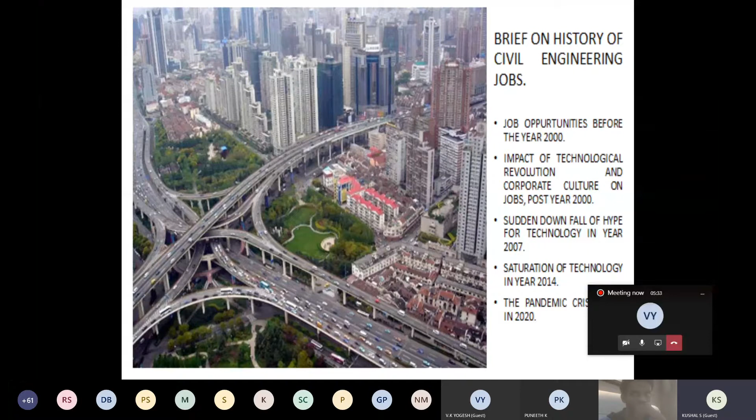It is a very tough time now, and hence I would request you all to have a little patience in learning and developing your skill set for thriving and surviving in this industry. Moving forward, we will be looking at the design and analysis of RCC structures. It was also mentioned that it is discussed using ETABS.

I would like to highlight to you all that these ETABS, SAFE, STAAD Pro, ANSYS, any of these softwares, please treat them as a tool, just as calculators, which will ease your calculation activity. Nothing else they can do. It is just as good as being left to solve a structural analysis problem with the help of a scientific calculator.

Only by virtue of having the scientific calculator, you cannot solve a problem. You cannot tackle a problem. You will have to have a thorough subject knowledge, and this scientific calculator can only ease the calculation activity. Otherwise, the rest will have to be a thorough subject knowledge.

Having said that, moving forward, we will be looking at the roles of a designer, a design engineer. See, the fundamental role is to see that the structure which he is designing has to stand safe throughout its intended period of lifetime. That is the foremost fundamental requirement. And in addition to that, in day-to-day industrial practice, he has to meet architectural requirements. He has to analyze the structure, design, detail, and on releasing the drawing to the site, he has to coordinate the design intent with the site team.

Is the drawing screen visible, guys? Yes, sir. It is visible, sir. Could you zoom in? Could you full screen it, sir? That I'll do. I just checked. Okay. Yes, sir. Okay.

Moving forward, being a structural engineer, how our structural engineering firm works is, we will be getting the architectural drawings. The architectural drawings will capture all the requirements of the client who is about to build that structure, whether the purpose of the structure or the functionality requirements within the structure. All of these fundamental requirements of the client will be captured in the architectural drawings, and an architect will share his design intent capturing the client's requirement with us, the structural engineer, for moving forward.

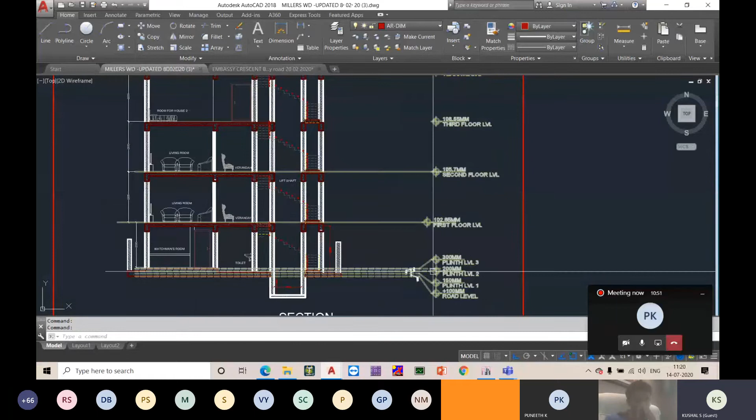And this is a simple residential building, a G+3 villa building, considered for simplicity of explanation. You can notice here the drawing contains ground plus three upper floors, in fact, plus terrace. This is the section which also explains the same: ground floor, first, second, third, terrace, and a roof headroom. So with this background, this building is for residential intent. We can notice the column to column grid may be hardly 12 to 13 feet, which means it will be less than 4 to 5 meters.

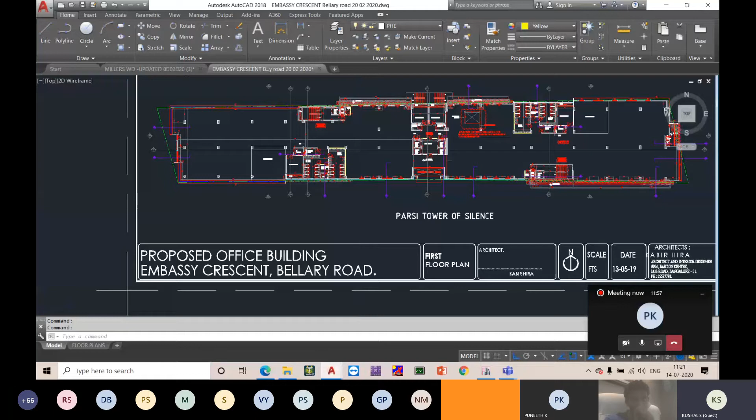Moving further, this is the architectural drawing of a different project, and the principal usage of this building is IT space. It's an IT building dedicated for Embassy in Bangalore. Since this is being used for office space, you cannot have the columns very close as we had in the residential buildings. In residential buildings, no bedrooms, living rooms, dining rooms or kitchens will be much more spacious than 15 feet, which is your 5 meters, and exactly to that extent you will be having the partition walls. See, this is your bedroom and it is 20 feet by 10 feet. Even with 20 feet, the column to column distance will be not more than 6.5 meters. So with this architectural intent, we can space the columns very close by.

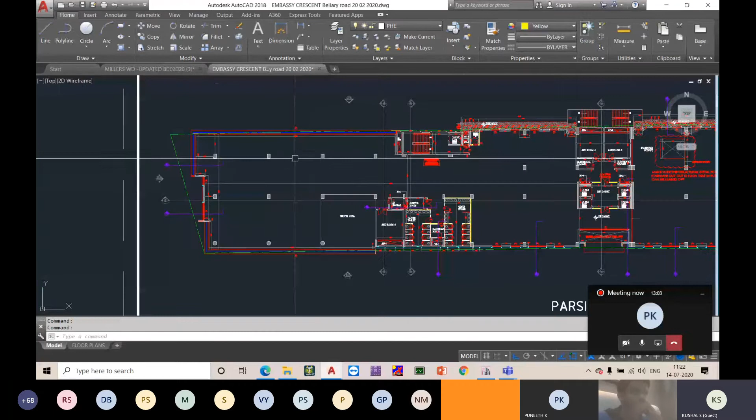Whereas in the other project, we provide column to column distances like 11 meters, 12 meters. In IT spaces or office spaces, you cannot give the columns close by because you will not be having partition walls, unlike residential buildings where rooms have definite partition walls to separate them from other occupancies. With this difference in requirement, we are forced to increase the column spacing in commercial or office spaces, and we can give closer column spacing in residential units. Even in apartments, you can restrict the column spacing well within the 5 meter grid. In office spaces, the column spacing will be at least an 11 to 12 meter grid.

So having said that, when we go ahead with closer column spacing, the beam depth will be proportionately lesser. Somewhat 450, 600 beam depths can be achieved with column grids less than 5 meters. In the case of office buildings, where the column grids are 11 meters, 12 meters, the minimum beam depth shall be 750 mm, 900 mm, 1000 mm, with which there will be a serious concern on the headrooms. See, consider any structure.

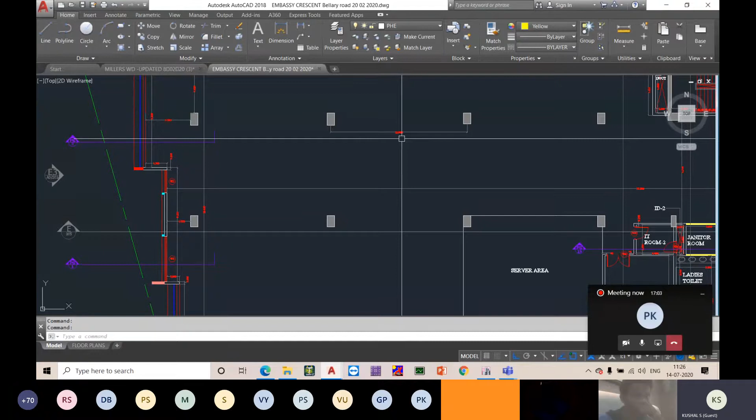The internal story height will be somewhere around 7 to 8 feet with the beam slab arrangement, with a regular arrangement like this. With the regular flooring arrangements like this, where you will be having columns tied with beams on all sides and the slabs are supported on these beams, you cannot achieve a story height of more than 8 feet in the commercial spaces, and that is not desirable. It will be very suffocating in the commercial spaces with lesser story height.

Hence, to achieve greater story heights, we are going to change the structural system. We will be adopting a system called the flat slab system, where we are eliminating all the internal beams. Here, the beams will be provisioned only at the periphery, and inside, the slab is directly resting on the columns. The beam column system will be provisioned only at the periphery, and no beams will be provisioned inside the structure. With this, what are we going to achieve? There will be a drop or a column capital right beneath the column slab junction, and hence the thickness of the slab at that junction will be around 450.

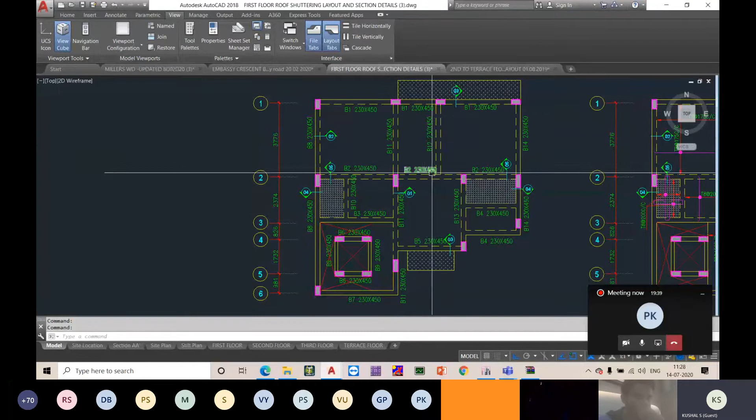So we are achieving a greater story to story height by avoiding the beams which we had in the residential systems. In the residential units, since the column to column spacing is very less, we can achieve lesser beam depths, so we will be moving ahead with the conventional beam slab systems. Whereas in case of office spaces or IT parks, the column to column spacing will be widely spaced, say double the space than in residential buildings. Proportionately, the beam depth requirement will be double.

It will be say 1000 or 1200, which is not at all possible, because if you are going to provide a beam of 1000 mm depth between these two columns, there will be a hindrance to the movement beneath that beam. There will be no sufficient headroom, because of which the people beneath the beams may feel suffocated. So with this background, I would also like to explain when we are going to consider steel structures.

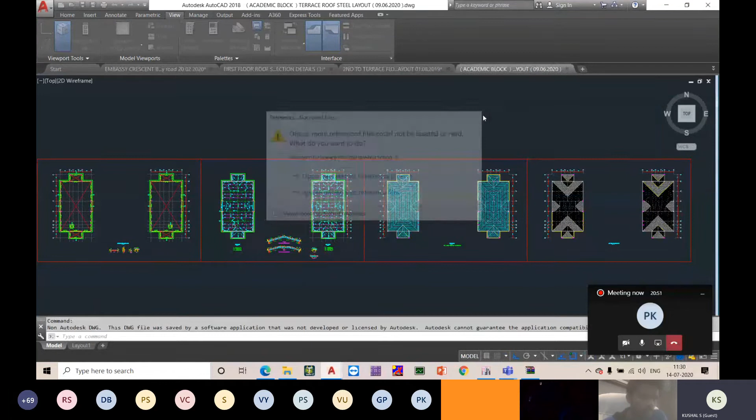See here, this is a drawing of a different project where the column to column spacing is 21 meters. Even the flat slab cannot support these longer spans, and hence here we are adopting structural steel. So basically the fundamental governing factor to adopt the load path system or framing system is our column to column spacing, and this column to column spacing will be governed based on the intended usage of the structure.

Here the intended usage of this structure is for residential purpose, and all the residences will have well defined rooms, bedrooms, living rooms, kitchen, which will not be widely spaced, and hence at every partition wall we are able to provision the columns. Moving next, this is an office space where the requirement is wider column to column space. With this requirement, we are unable to restrict the beam depths to provide higher headrooms, and hence a different structural framing or load path supporting system will be defined here with the flat slab system.

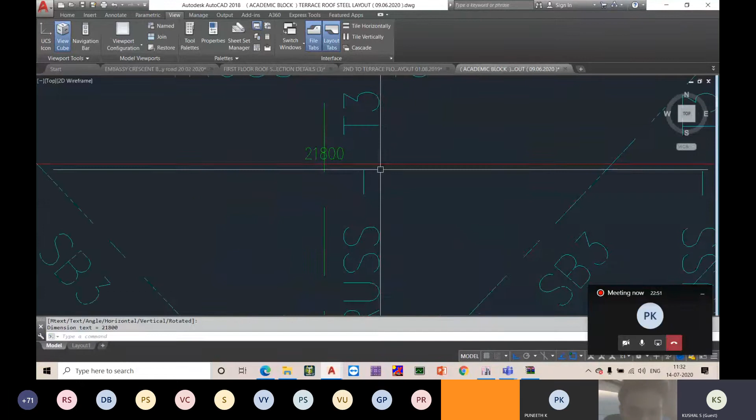Moving forward, this is a convention center or an auditorium where you will be requiring much wider space, somewhere around 21 meters. This is 21 meters, and when it is 21 meters, it is impossible to support it with RCC, and hence we are switching to structural steel.

Moving ahead, there is one more system called composite system, which we adopt when the structure is already well built. Say we have already built a structure with floor to floor height for an industrial building, usually 12 to 14 meters. If a client approaches you for addition of an intermediate mezzanine level, you cannot have the floor with steel, and RCC inside an already built structure will be tedious.

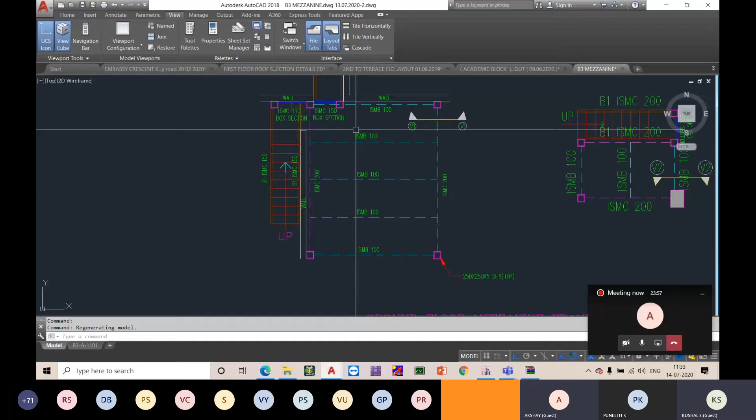So we define a system called composite system, where we have steel beams and steel columns supporting the intermediate level slab, since you're going to use that slab as a floor to walk and sit on. Having just a steel sheet introduces vibration and creates sound, which is undesirable for working purposes. Hence we have a thin layer of RCC concrete above the steel decking sheet. The decking sheet is steel and the topping is concrete - together two different materials, so we call it a composite structure.

So with this, I hope I've explained the way we adopt various supporting systems for load transfer, considering the intended usage of the building. The only governing factor for deciding which system to begin with is the intended usage of the structure.

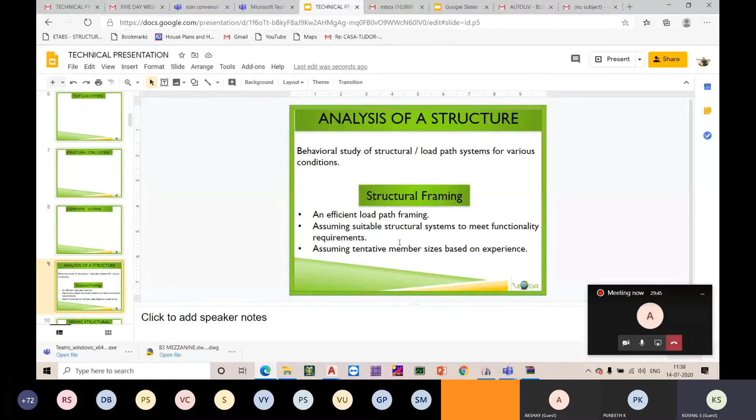Okay, we are restricting our today's discussion only to gravity load analysis and design, not seismic. But seismic and wind, these lateral loads, will have a greater impact on structures, especially high-rise or long span structures. So you cannot directly ignore lateral loads. It has to be considered in a definite amount, but only for today's discussion, because of the time constraint, we are restricting ourselves to gravity load analysis.

And why do we do this structural analysis? We do structural analysis to confirm the load transfer mechanism is as defined in the framing level. In the initial level, when the architectural drawings are shared with us, we will be defining the column locations and beam arrangements considering the load path mechanism. The analysis we carry out is to make sure my structure is behaving exactly as I have defined in this framing layout.

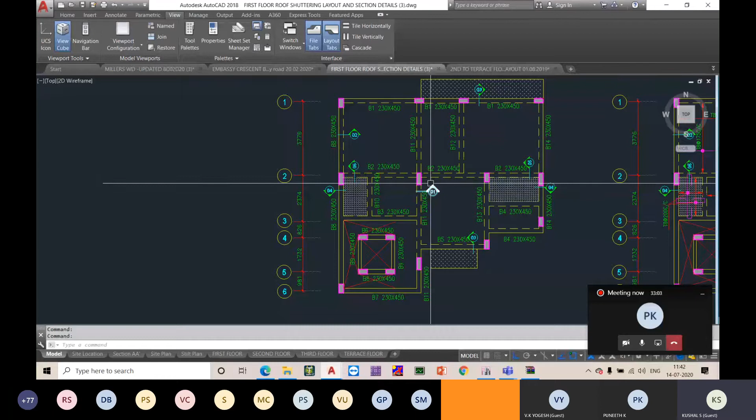Now, to begin with, based on experience, for the given loading we will be proportioning and positioning the column sizes and locations. It may not be final, this is the initial or conceptual drawing, and we will make sure whether my given dimension is adequate for the given loading. We have defined the column to be dimensioned as 230 by 600. This is the initial assumption we are making, and only after the structural analysis, only after we understand the reaction forces developing in this column, will we be able to conclude that the assumed size is adequate for the given structure.

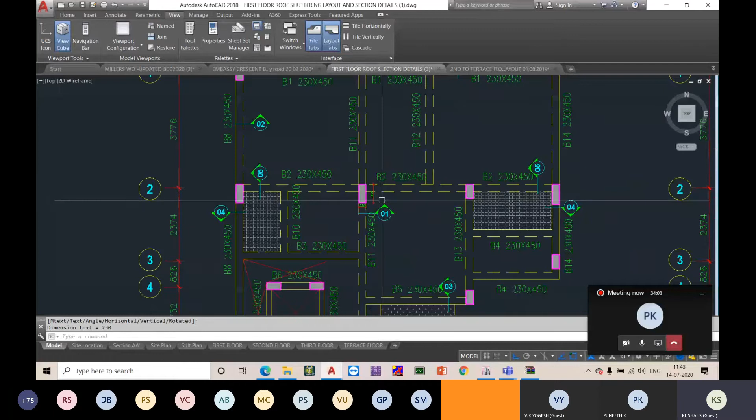So this is also what we will be doing with the help of structural analysis. So our discussion is, why do we do structural analysis? Even after completing my education, I was wondering why exactly we do structural analysis, and after all these years of work, I am able to conclude these are the essential things we extract on doing structural analysis, and this is why we need to do it.

Moving forward, to analyze any structure, we have several methodologies, and the widely used three are experimental approach or experience, analytical approach, and numerical approach. Experimental approach is where you create or cast a prototype exactly the same as the intended structure, allow it to cure for 28 days, apply the loading, and analyze the structure. This is how we analyze with the help of experimental approach.

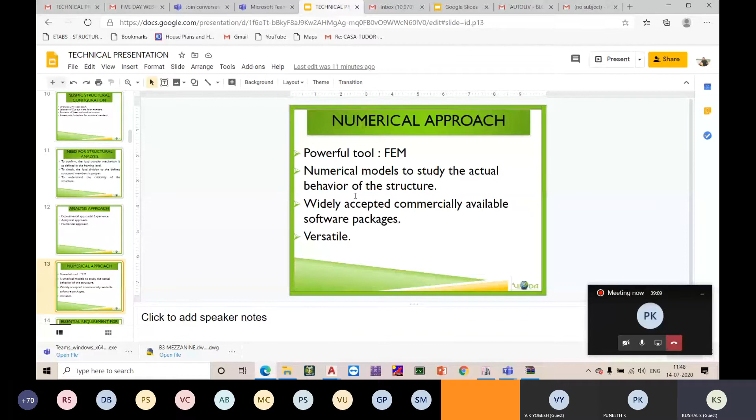Currently what we are using in the industry are STAAD Pro and ETABS. These are based on the FEM method. The fundamental basis of ETABS and STAAD Pro software is the finite element analysis method. This is very widely used - maybe 90 to 95% of industry practitioners all over the world use ETABS or STAAD Pro, which are dependent on finite element methods as their fundamental basis.

The very essential requirement, even before we start using these softwares, the basic thing we need to understand is that all of these softwares will behave exactly how you treat them.

Any structure that is modeled and analyzed, the results will be dependent on the inputs you give into the software. The software doesn't know whether the column to column spacing in the drawing is 11 meters or 10 meters. While inputting, if you make a mistake, say 7 meters or 5 meters, the software will grab it and the results will correspond to it. So the fundamental requirement while using these softwares is that you have to be very cautious.

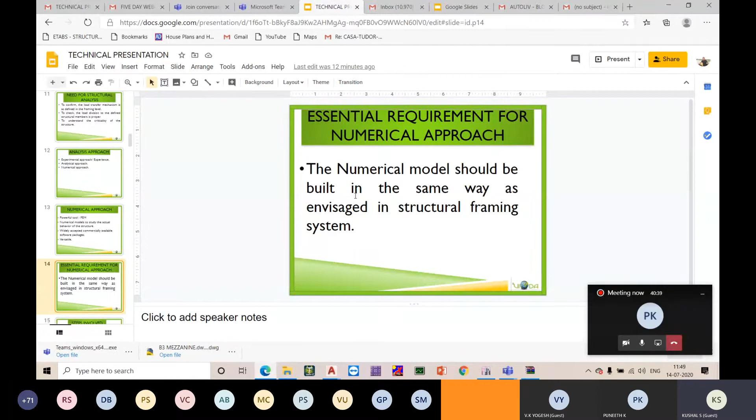The modeling should be done the same as it is in the drawings, and any deviation, any mistake while inputting the data, you will end up with erroneous results.

This entire process of numerical approach, or the analysis and design of the structure that we do in ETABS, involves three steps, three stages. The very preliminary stage we term as the pre-processing stage, the next will be the solver, and finally it will be the post-processing stage.

In the pre-processing stage, you will be inputting all the required data to ETABS. It is just like modeling your geometry into ETABS. You will be defining the construction materials - the grade of concrete, the grade of steel, the sizes of columns and beams, and the thickness of slabs will be defined, and it will be modeled accordingly. The loading - the intended loading, say the slab may be used for residential purpose or office purpose - the residential loading will be different from office loading.

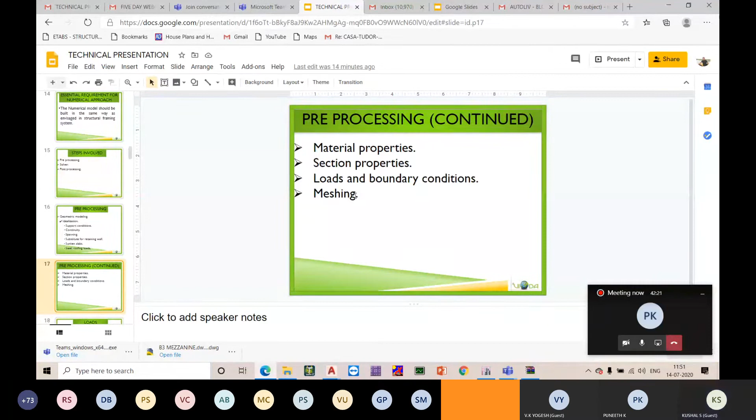So the intended loading will be assigned to the slab accordingly. With all of this data inputting, we will be assigning the boundary conditions and meshing the geometric model.

The loads we consider will be based on IS Codal provisions, and this is a very vast subject which we cannot discuss well within 2 hours, so I am just giving you an idea of what exactly the process is, how exactly the system is going to be followed.

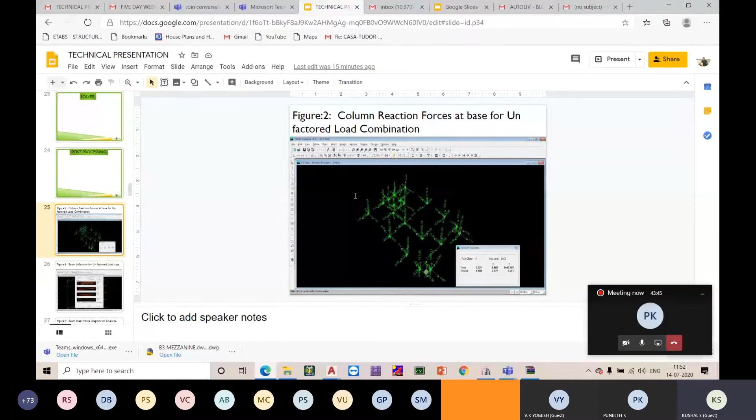And the results you read once the analysis is done - that process we term as post-processing. The various results we extract from ETABS are the column reaction forces, which we extract for designing the footings, and the beam forces like beam deflections, bending moments, shear force, and torsion in a beam - these are the results extracted in the case of beams.

So this is a brief on the entire process that is involved in the structural analysis. Prior to starting the structural analysis, the process we follow and the subsequent phase we follow is what was briefly discussed. With this on board, I would like to just demonstrate to you guys how to model a simple residential building, how exactly it will be done using ETABS.

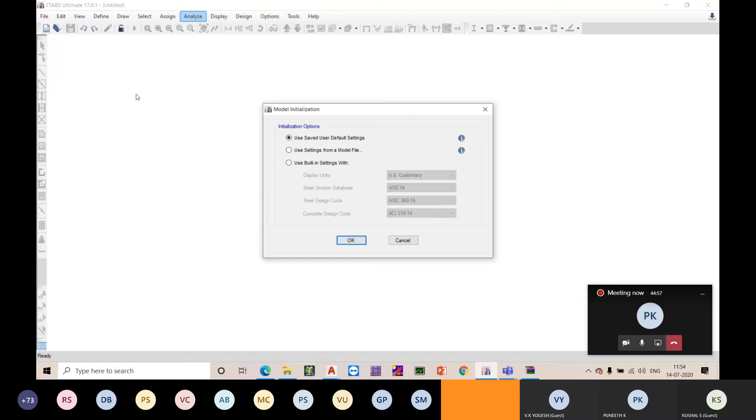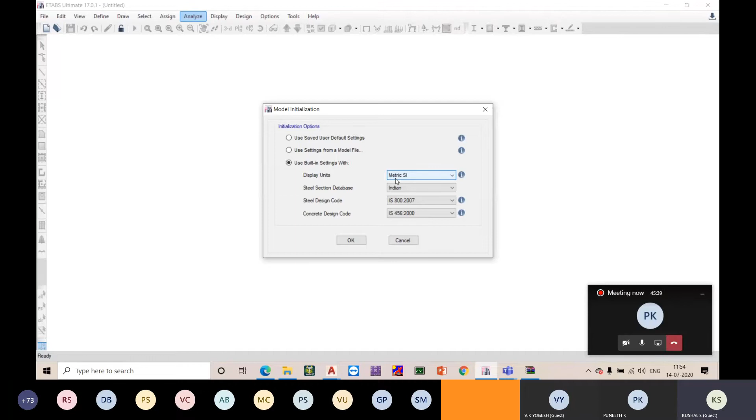On opening the ETABS dialog box, you will have to start with a new model, where you will have to be customizing your inbuilt settings. In general, the unit system we will be adopting is metric. Since we are sticking to the Indian standard codes, all the codes of practice should be Indian standards. These are the necessary changes you will have to do at the very early stage: changing the unit system to metric, and all the codes of practice should be Indian standards.

Moving further, we will be considering a G plus 3-story building. There is an option called bottom story height, and this height will be the height from the top of the foundation till your plinth beam level. The height will be, say, 1.5 meters, 5 feet in practice. Generally, it may be even more than 1.5 meters, but mostly 1.5 is used. And the story heights will in general be 3 meters, which may be much more in case of commercial spaces. Since we are considering 3 floors and there will be 1 terrace story, we are considering altogether 4 stories.

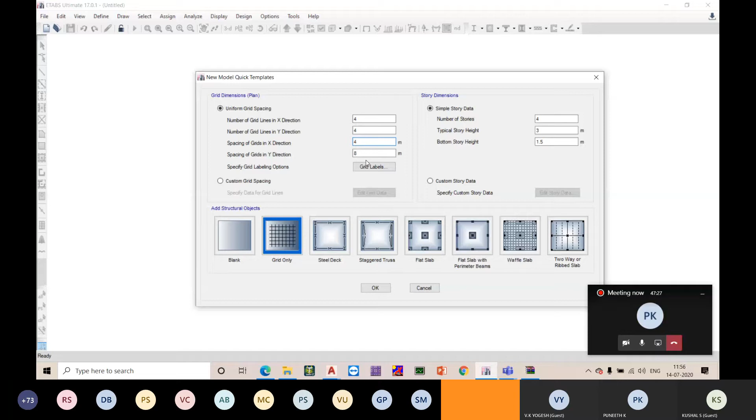Okay. So with this, we are starting with the definition of the properties. You start from the define tab and start with the material properties definition. The region we are in is India, and when we are considering concrete, we will have various grades of concrete inbuilt in ETABS. Whichever grade you require, you can choose it. And M25 grade of concrete is defined.

Again, new material. We will again choose the Indian region. Material type is now changed to rebar. Steel is different and rebar is different. Rebar is something that is used with RCC. Steel is something that is used in structural steel designs. So in ETABS, the term steel is used only for steel structures, and rebar should be used when you are modeling RCC structures. In rebar, you will have various grades of rebar steel available. They may be 415 or 500; choosing Fe 500 grade.

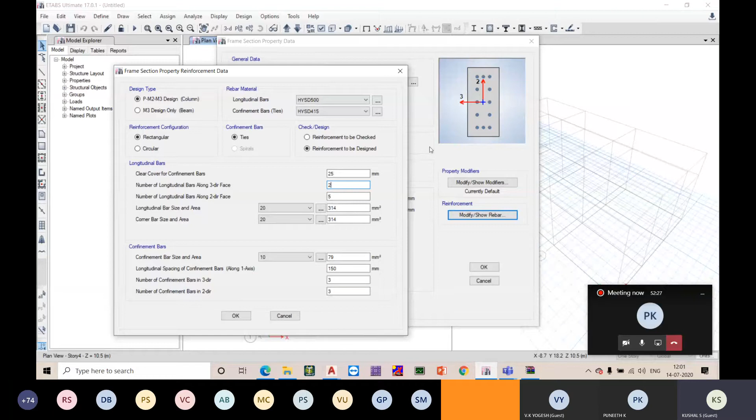Now we are defining the column section. Again it will be 200 by 450 M25. Longitudinal bar will be 500, confinement 415. The design type will be column. Clear cover for columns of 200 or less will be 25. The bars along the 200 width direction will be 2 numbers, along the 450 direction 5 numbers. And that has been changed. This is how we define the column section. Now we will also need to define the slab section.

Slabs can be of two types, one-way slab and two-way slab, depending upon the aspect ratio, the ratio of your longer span to shorter span. You will be deciding whether the slab is one way or two way, and you will be defining a one-way slab, 125 thick, M25. Thickness will be 125. The modeling type should be membrane, and the load distribution will be done in one-way type.

You will also be defining the slab as a two-way slab, 125 thick, M25 grade. This will be not checked. This is a two-way slab. The difference between defining the one-way and two-way slab is, for one-way distribution you will be checking this box. For two-way distribution you will be unchecking this box.

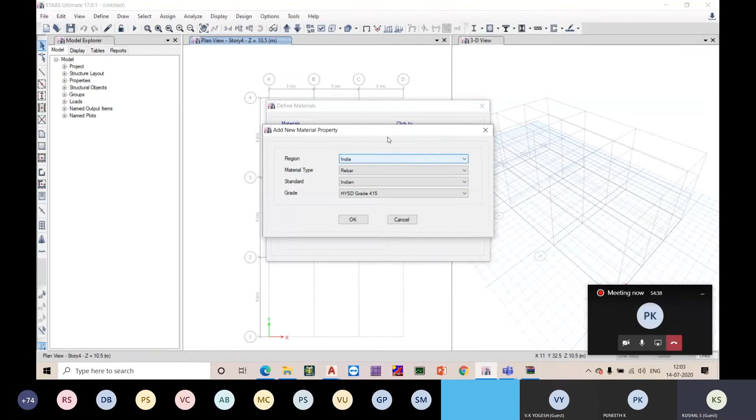With this you have defined the material property, and to define it you are getting into the Define tab. Under that, Material Properties, add new properties, India. If you are about to define the rebar steel, you will be changing it to rebar. If you are about to define a concrete, you are changing it to concrete. And the grade of steel or concrete will be changed with the help of the grade drop box.

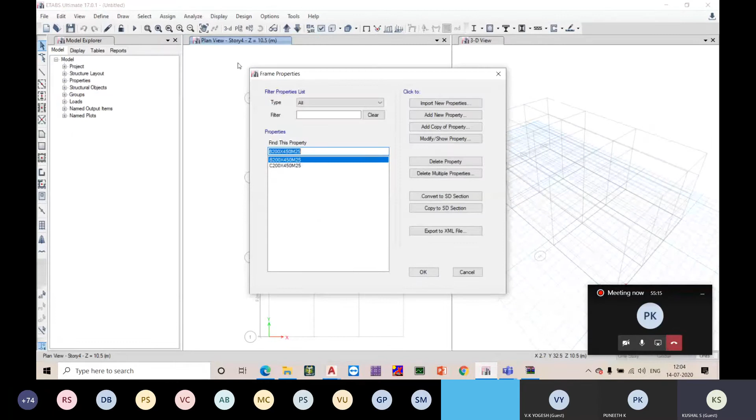This is how you will be defining the materials, and you will be defining the beam, column and slab frame sections. To define that, you will be getting into section properties. Beams and columns fall under frame sections. In the frame sections, you are going to start with add new property. Since this is an RCC structure, you will be selecting a section shape under concrete, and here you will be defining whether it is a beam or column, B and C for beam and column.

You will be defining the width and depth, and also the grade of concrete. Grade of concrete of the material will be changed here, and width and depth will be changed here. The type of the section, whether it is column or beam, has to be defined here with design type. Accordingly, the rebar material that you have defined will have to be changed in this dialog box.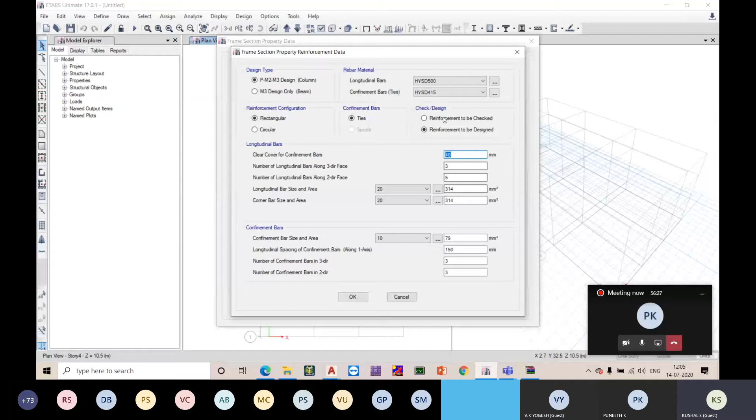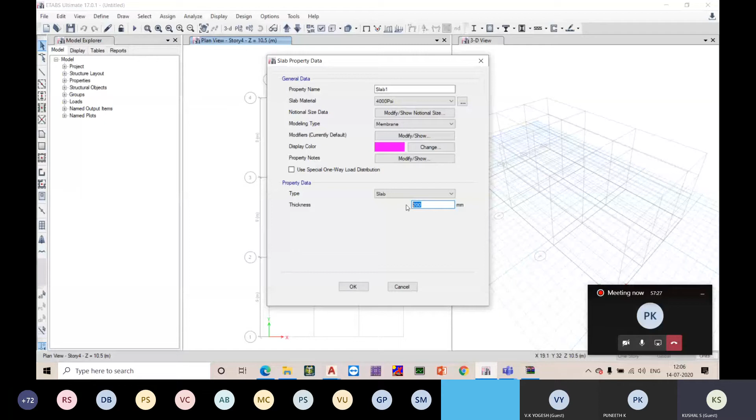Finally, we had also defined the slab section here, and the slab section can be defined in two ways. It can be either a one-way or a two-way slab. You will have to input the membrane type, and to define it as one way, you will have to check this box, and you will uncheck the same to define it as two way. The thickness of the slab will be defined here. So this is how we are defining material properties as well as the section properties.

Once we are done with defining materials and sections, we will be starting with the modeling. See, the moment you select this column drawing tool, it will be displaying the property type it is having by default. It is beam B200 by 450 M25. So this is why it is very important to define whether it is a beam or column. With this you can directly know what exactly that section you have defined as.

Now taking this as C200 by 450 M25, and the orientation of the column can also be changed here. See, now it is 90-degree orientation, and you can adapt it as 0-degree orientation too. By default, the modeling will be happening at the topmost story. You can draw at each and every grid point, or you can simply replicate this. Edit. You will be selecting all of these columns. Edit, Replicate.

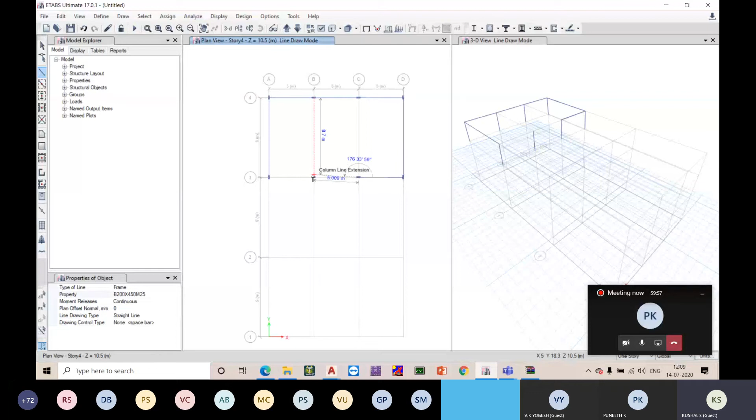Next we will be modeling the slab. By default, the property of the slab will be Deck1, which I am changing to slab one way. All right. Now, modeling of columns, beams, and slab is completed. See, this arrow indication is indicating the load distribution, and it is precisely indicating that the load distribution is happening only in one single way.

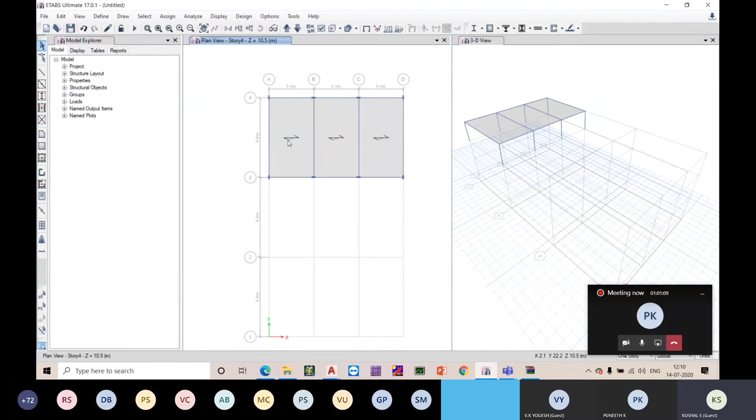And now we will have to assign the loading to the same. The loads can be acting on slabs as well as on the beams. All of the walls predominantly will be built up above the beams, so you will have to be calculating the loading that is happening because of the construction of the brick walls.

That particular loading will be assigned onto the corresponding beams, and the intended usage of the slab, whether this slab is used for the residential bedroom, residential living room, or for the toilet purpose, or for office space. Each and every different usage may have different loading.

See, the residential bedroom or living room live loading will be, say, 200 kg, whereas the commercial loading will be 400 kg, which is double. So based on the intended usage, the different loadings will be assigned on the slabs. Shell loads: you will be selecting those slabs on which you are intending to assign the loads.

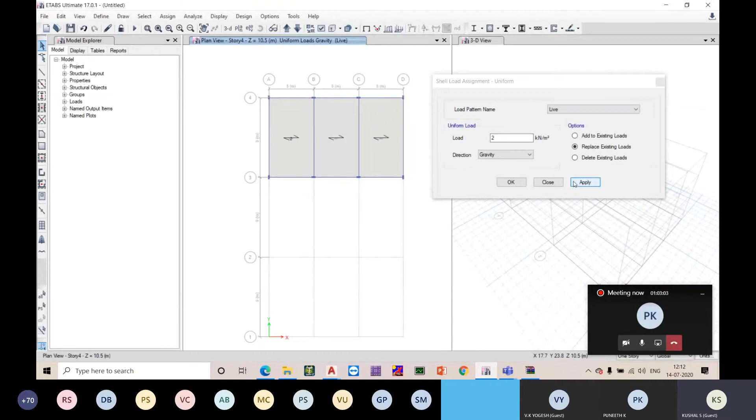First of all, I am going to select only this slab. Assign shell loads, uniform. I will be defining the live load. Say this portion is my toilet area. The live load for the toilets will be 200 kg per meter square, which is 2 kilonewton per meter square. I am applying that. It is applied, 2 is applied here.

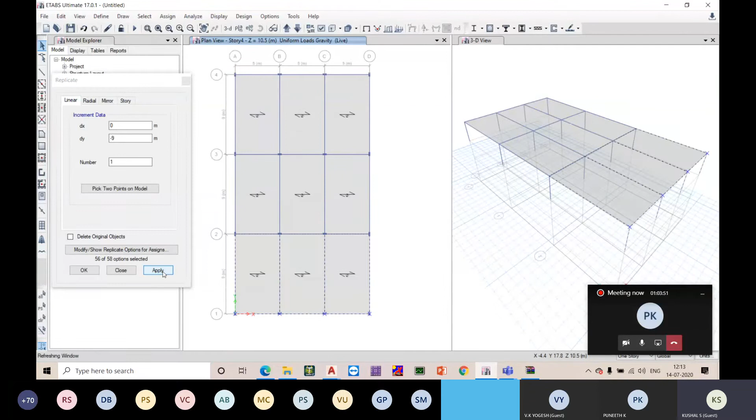So this may be my residential living rooms, and again the live load for the residential living rooms will be 200 kg per meter square, which I have assigned. Next, I will be replicating all of these. Edit, replicate, again -9, again -9. It is asking. Okay. All right.

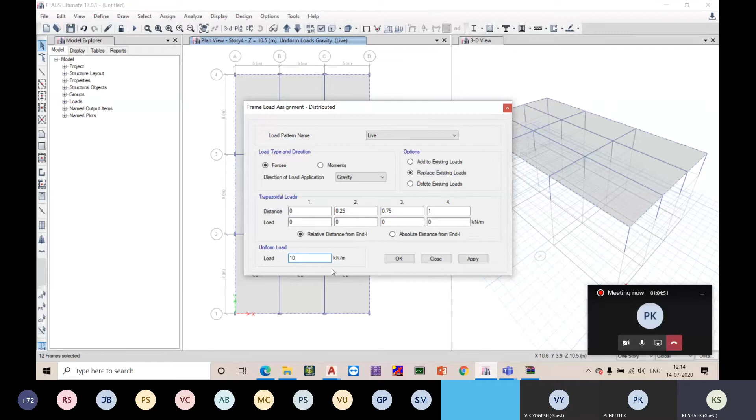So this is a simple way of modeling the beams and slabs in a residential unit. We will also be assigning the wall loads on these beams. Assign frame loads, distributed. If you calculate for a 3-meter story height, the wall loading for a 200 thick brick wall will be somewhere around 10 kilonewton per meter. That is assigned here.

Now the similar thing we will be replicating story wise. Edit, replicate story. Till now the replication was done in plan along the linear motion, but now we are doing it story wise. The current plan is of story 4. Now I am replicating it to story 3. One more story has been added. Next I am replicating it to story 2. Again I will be replicating it to story 1. Again I am replicating the same to base. Okay.

See, here I am selecting one story in the dialog box, and in the base I will be having only column and foundation. No slab and beams will be there. I am deleting the same. Let us name the stories first for better understanding. This base will be foundation level. Story 1 will be your ground floor. Story 2 will be your first floor. Second floor, your terrace. Okay.

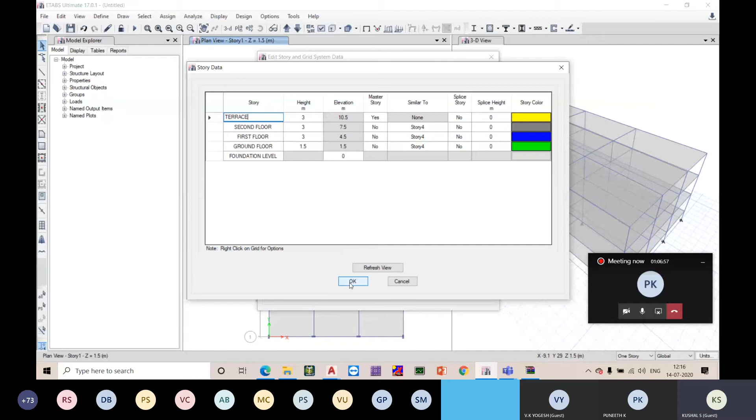So in the foundation level, you will be having only column and your foundation, nothing else. So we have deleted all the beams as well as slabs at foundation level. In ground floor, since there is no basement, the soil will be filled up till the ground level, and hence no suspended slabs will be there. We are deleting the slabs at this level too. The beams will be there for the tying purpose, and these beams will be termed as plinth beams. And there will be beams and slabs at every intended floor level.

This is how we will be completing the creation of geometry, that is modeling it, definition of material properties, definition of section properties, and the loadings being defined. There are many other patterns of loads you can define, say your earthquake loads, seismic, which we term as EQX and EQY.

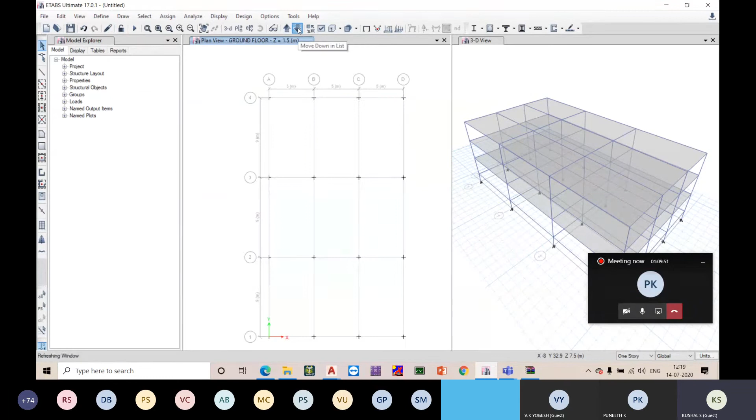Okay. So with all of this done, you will be assigning the boundary condition to your columns at base. This is completely fixed condition, with all translation and rotation restrained. This is a pinned condition, where only translation is restrained and rotation is allowed. This is the roller condition, where translation is allowed in two parallel directions and only the vertical direction is restrained. This is free condition. So now we are assigning the fixity condition at the base of the column, and we will have to save this first.

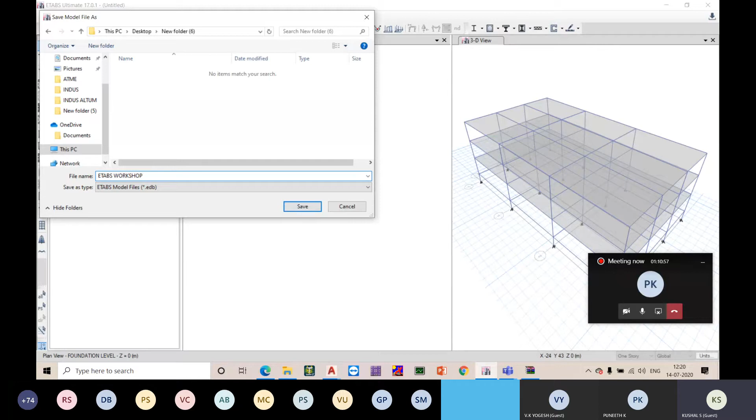Now you are setting the model for run. Before running, there is one exercise we will be doing, which is to check whether the model you have done has any warnings. So the model has been checked, no warnings, no warning messages were generated.

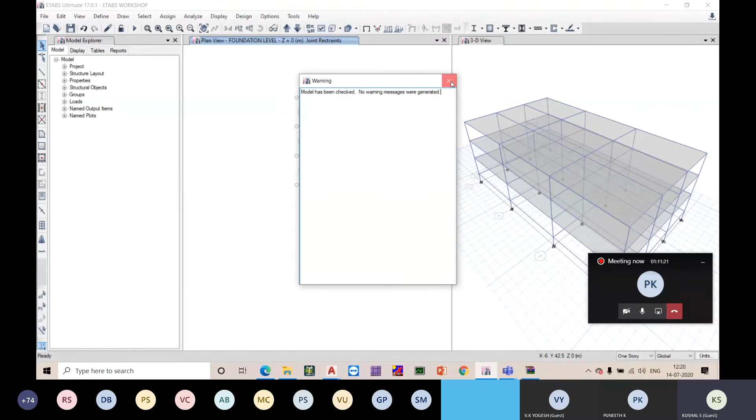Usually what happens is whenever you draw a beam above the beam by mistake. See, there was a beam earlier. I have drawn one more set of beams, and now if I check the model, sorry, we have not checked it here.

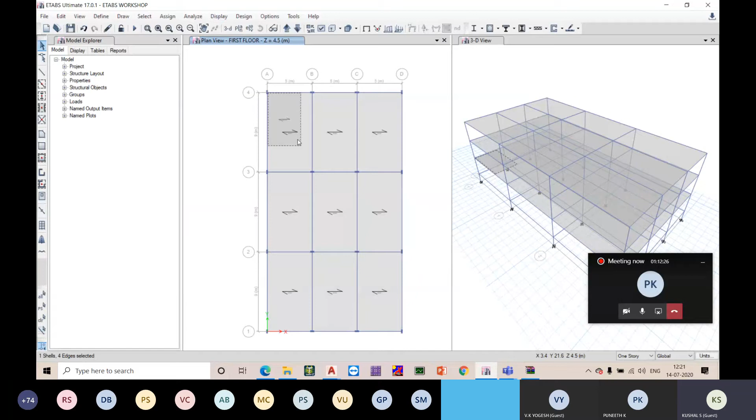Okay, there is some technical issue with the software. This is a different laptop I am using, but usually the error messages will arise whenever you are modeling a slab above the slab and a beam above the beam. So that is why we will have to check the model before running it for the analysis. Just in case you have by mistake modeled a member above the member, that may be a reason for erroneous results, and hence you will have to check your model once even before starting the analysis.

Okay, now we are running the analysis. The structure is analyzed, and this process will be done with the help of solvers.

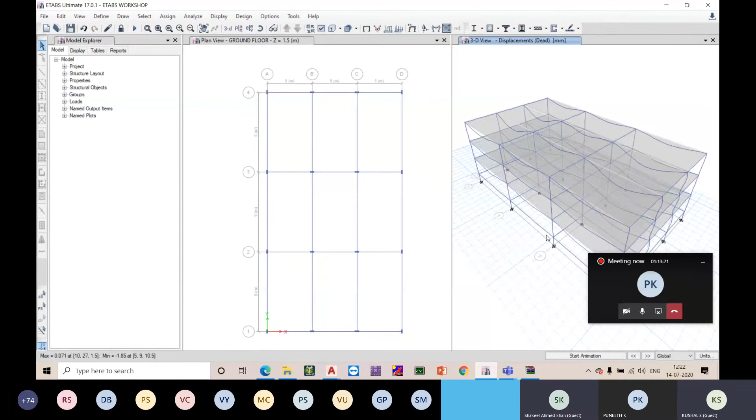Can you please unmute yourself? Okay.

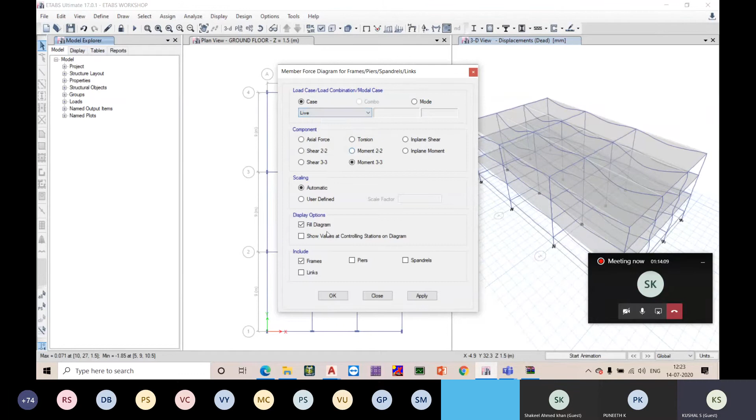So this analysis process will be done with the help of solvers, and the solvers are based on artificial intelligence. Here it will be self-solving your analysis. So once the analysis is completed, next you can post-process your results, that is the forces. See various results like the bending moment diagrams, shear force; bending moment and shear force for beams we just had a look at.

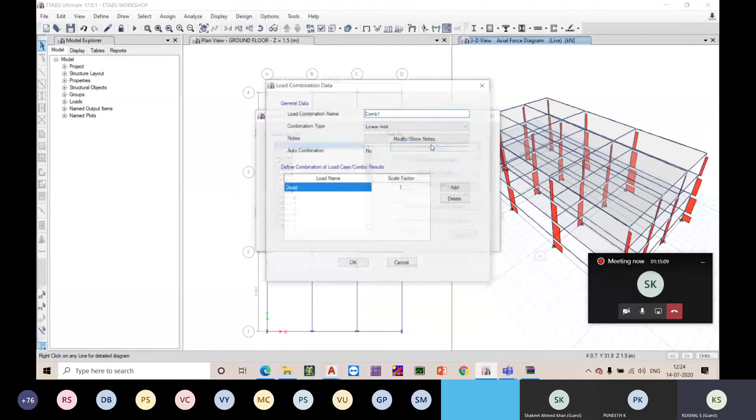Now the axial forces in the columns can also be witnessed. Okay, the axial forces in the columns, and also the base reaction at the column. This will only be furnished for the unfactored combination. You will have to define the load combinations at default design combos for frame designs. Okay, one more set of combos for base reaction. Here you will be having both of these with scale factor 1.

Okay. Display. Combo, your base reaction. Apply. So the base reaction at every column can also be post-processed.

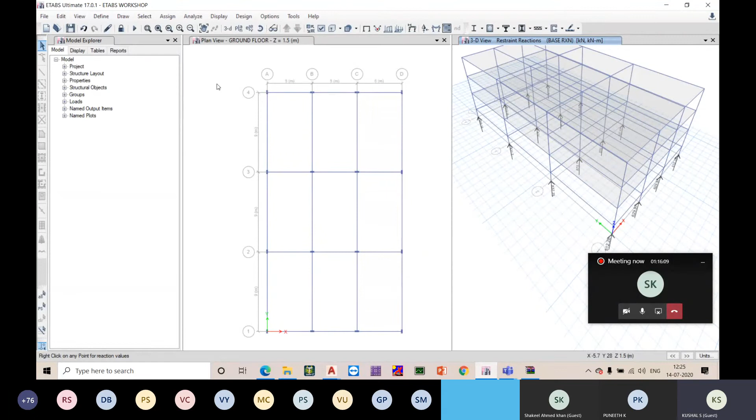So guys, the process before running this analysis, all the activities we did, like creating the geometry, drawing the geometry, defining the materials, section properties, loadings, assigning the material property and loading, all of this is the pre-processing stage. Next, in the solver stage, the program ETABS uses the artificial intelligence that is imparted to ETABS.

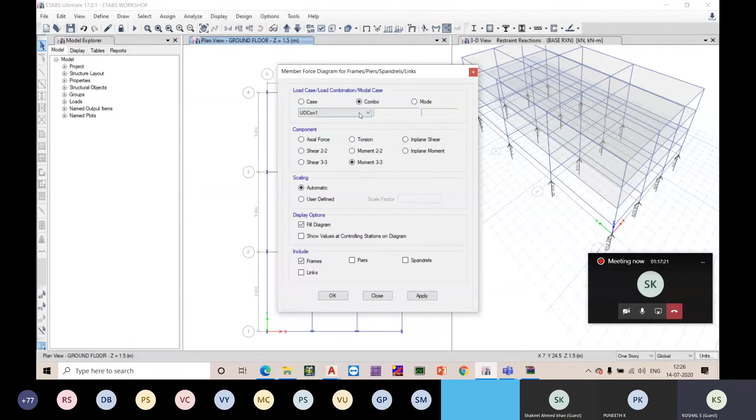You will have to do nothing if you are done with correctly inputting the geometry, the material properties, section properties and loadings. ETABS by default, using artificial intelligence, will do a finite element analysis using the solvers, and on completion of the analysis you can read the results of the analysis, like your base reactions, your beam reactions, moment, shear forces, your column axial forces, and torsion in beams if any, even that we will be able to read.

All of these results are analysis forces, the results of analysis. So far we haven't conducted any design in this model, and so far what we did is only analyze the structure and read the analysis results.

See, designing is not a big deal in ETABS. You will just go into design, select concrete frame design, and select this tab, start design check. Even the design of the RC members is being done. The end result of this design is you will get the necessary steel that needs to be given to these beams and these columns to stand safe during the intended usage.

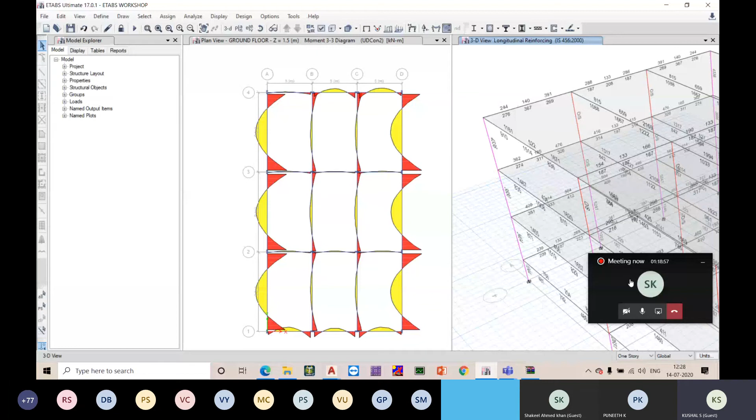Okay, so that is how we can carry out this intended analysis in ETABS.

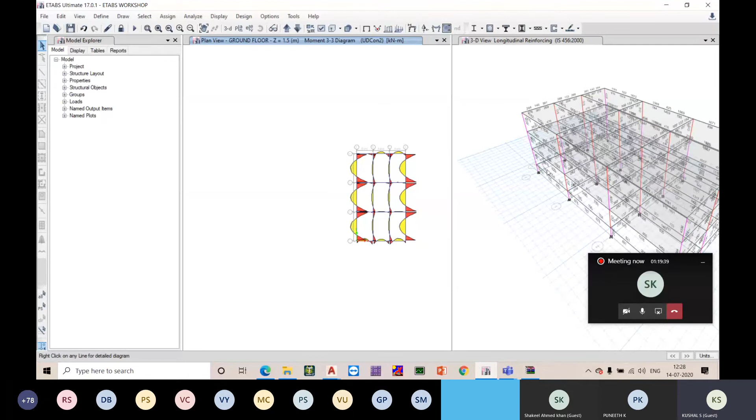And guys, as I said, you will have to use ETABS or any software just as a computer. See, just because ETABS is giving some result, you cannot directly consider the same thing and start delivering to the site. Okay, you will have to have a feel for the structure, whether the results displayed in ETABS are correct.

One thing is that based on experience, based on the several structures that you have designed, you will get a fair feel or idea whether the results extracted from ETABS are correct or not. Otherwise, you will have to correlate these results from ETABS using analytical methods like Kani's method and the moment distribution method for at least one frame. If you are able to do that, like

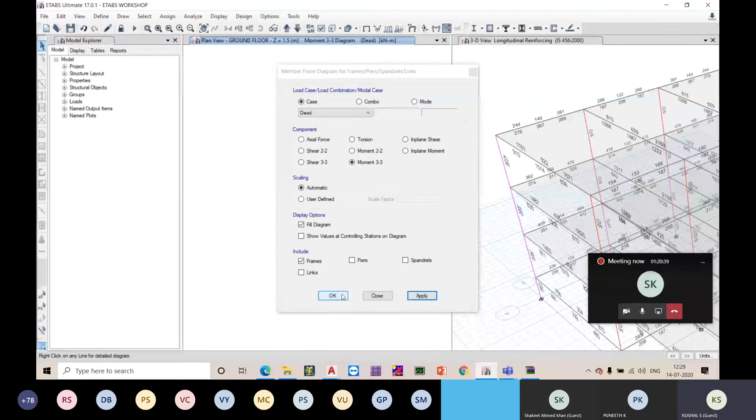Wait a second. Okay.

See, considering any one of these frames, if you are able to conduct the Kani's method or moment distribution method of analysis, and if your analytical results are matching with your ETABS, then you can conclude the results from your ETABS are safe and you can carry out your designs. Otherwise, due to some erroneous input at the stage of pre-processing, the entire design procedure may end up with errors and a big blunder can happen at site level.

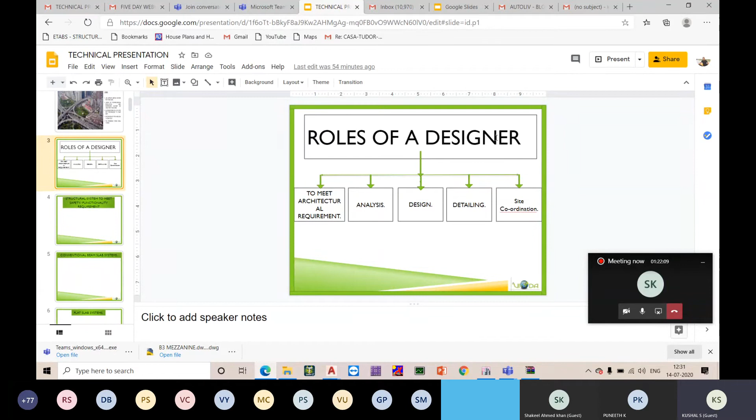Okay, so having said that, RCC design and analysis, even using ETABS, cannot be addressed in one single session of 2 hours. So with the idea of motivating or inspiring you guys, I had to start with briefing you on the current seriousness of the job for freshers like you, and moving further we discussed the roles and responsibilities of a designer and what exactly he will be doing sitting in his office. Studying the architectural drawings, how exactly he will be deciding the structural framing system or load path system to analyze the structure, and why exactly we do structural analysis.

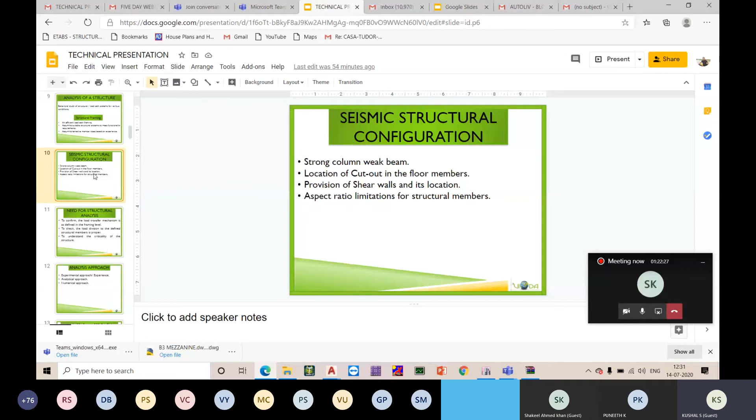So what we have discussed, and a simple model was also done with the help of ETABS just to give you a fair idea. But trust me, what we have discussed is not even 5%. And with this knowledge sharing, I seriously advise you guys, don't be under the impression that we have covered all the aspects of structural engineering or design, and this at least requires some 60 to 70 hours, even in a very compacted, crash course manner.

With this limited or constrained time slot, the whole idea is just to give you an exposure to what exactly structural analysis and design using ETABS is, and what you will have to do after this is study more and more structural analysis and design books, but ultimately only when you are able to work on a particular project will you get a fair idea of industrial practice. Otherwise, only taking some textbook examples, I don't think even that will be able to impart a fair level of knowledge.

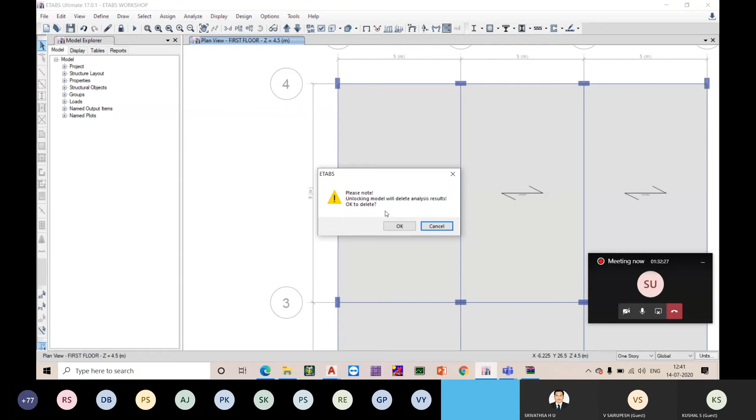Please read the session present in the class section. Considering this plan, the span of this beam is more compared to the span in the other direction, and the column orientation should be done such that it is oriented in the loading direction. If you orient this column in another direction, the effectiveness of this column will be lesser.

But you cannot stick to a point that you will only orient the column in the loading direction, because the architectural intentions may be different. Say my architect needs a door opening in this corner — I cannot insist strictly on the column being in this direction. We will compromise in some cases based on functionality requirements, and reorient the column so that it is designed in a compromised manner.

Sir, but the one you explained is not oriented in the direction of maximum bending load. Just to the right, the fourth grid line, the second column — it is not oriented towards the maximum span.

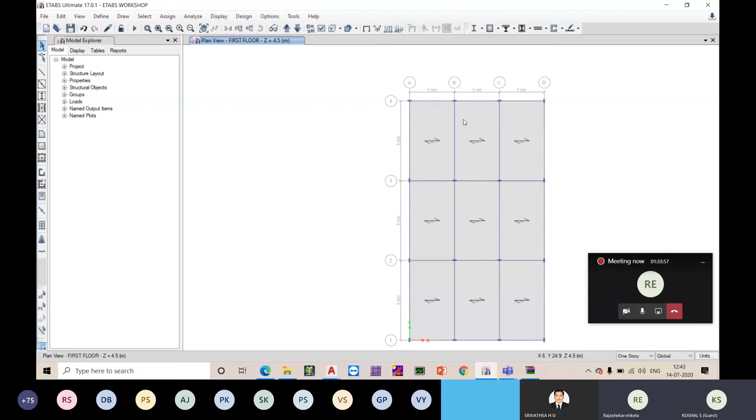Correct. See, what will happen is, since this is the periphery, my architectural walls will be in this direction — I may not be having an architectural wall here. So I cannot give a column orientation such that it protrudes into my usage space. If I reorient this column, there may not be a wall in this direction, and the only wall is happening in this direction.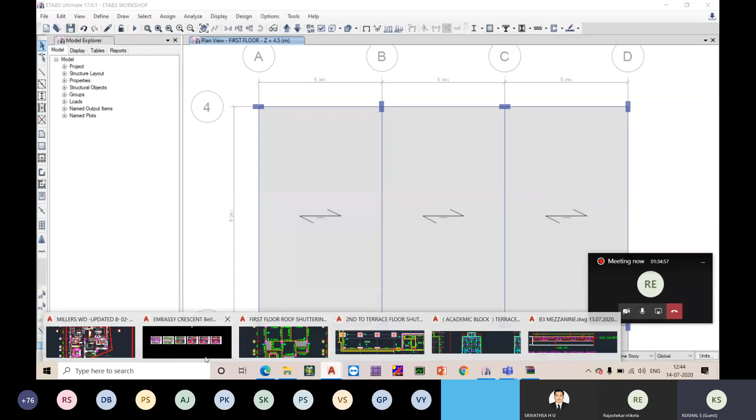So this additional width, considering the wall thickness is 200, the additional 250, since the depth is 450, the additional 250 will be projecting inwards, and no architect, it is definitely a very awkward situation to visualize. And hence what we will be generally doing is, if you can notice here, all of my columns will be concealed within my walls, within my architectural walls. See, I cannot reorient this column so that...

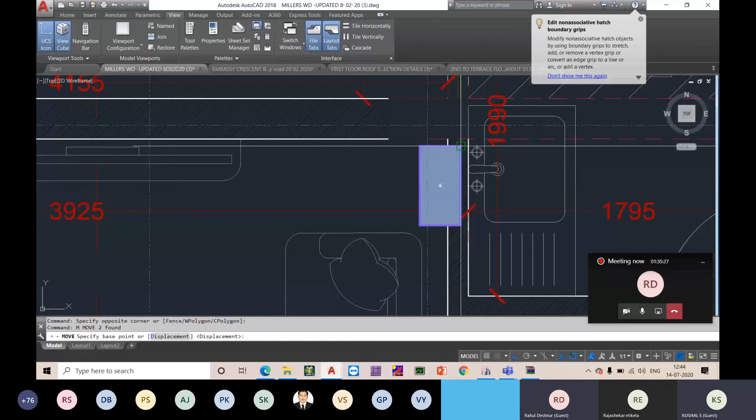If I am able to reorient it in another way, there will be this projection. There will be this offset from the wall, this projection of the column from the wall, and which will be very awkward to look at. So in general, what we will be doing is we will be concealing all of the columns into my architectural walls. That is how every column location is decided. If very preliminarily we will be focusing on my framing system.

Tell me, for the secondary beams, do we release the moments? Obviously, we will have to be releasing it. See what happens is, if we do not release the moment here, this beam, see the moment at this junction of B12 is not released. If suppose it is not released, my B2 will experience torsion.

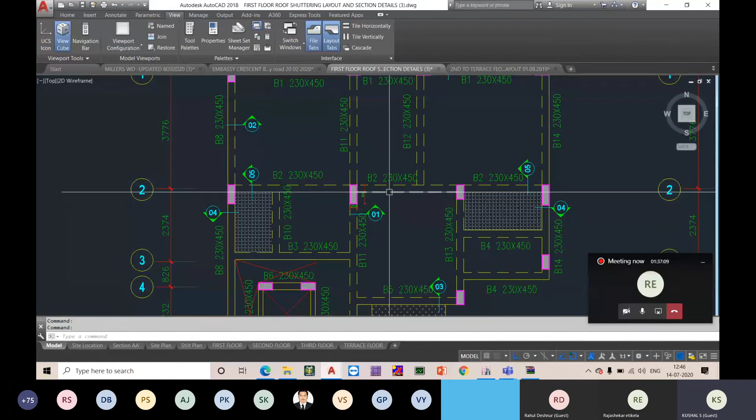You can actually make a choice. If you are releasing this moment, you need not design this beam for additional torsion. If you are not releasing this moment, you will have to design this B2 for the additional moment, additional torsion that is being introduced because of this moment not released at this junction. Okay, it is actually a choice. If you are releasing, you are designing this beam without torsion. If you are not releasing, you will have to design this beam with torsion. And with torsion, the design may actually fail this beam, and hence if you are unable to satisfy the design of B2, by default you will have to release this moment.

Anything else? How to give floor loading for a cantilever projection of the slab? The same way how you define it for every other floor, you can give a floor loading even for the cantilever slabs.

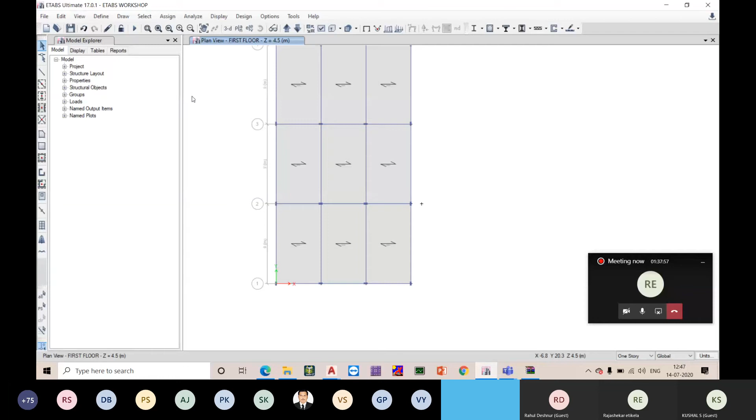We will be defining one more section type for that. Shell 125, it will be with M25. See, for the cantilever slabs, we will have to be considering modeling type to be shell. I'm assigning shell section to be shell 125.

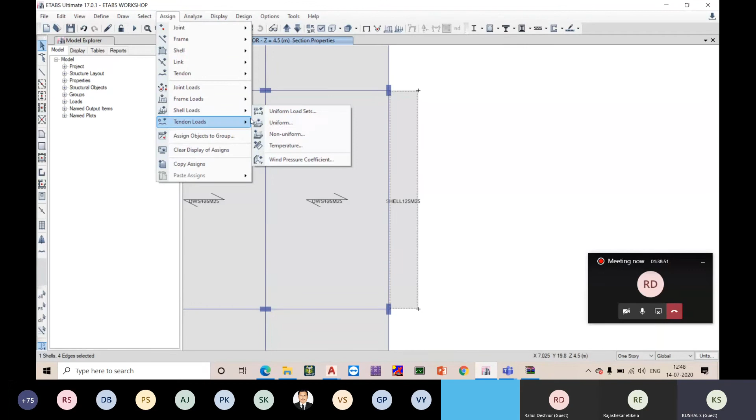Same way you will be assigning your shell loads. Since this projection may be a balcony, the balcony loading will be 300 kg. We have assigned that. Maybe your doubt is the edge parapet loading on this balcony. Is it so?

Yes, sir. Okay, see, there are two different ways of assigning that loading. In ETABS, we are not designing the cantilever slab. We are designing only beams and columns. ETABS software is exclusively for the design of frames, that is beams and columns. No foundation and slabs can be designed using ETABS. For designing of the foundation and slabs, we will have to be using a different software called SAFE.

So here the assigning of load is with the idea to transfer all the loads to my beams and columns. You can assign the parapet loading. One of the ways, you will have to be calculating the entire parapet wall load and divide it with the help of this area.

Say my parapet wall length is say 1.2 on either side, 2.4 meters, and this will be 9 meters. So altogether it will be around, say, 11.4 meters. This is 1.2, 1.2, 2.4 and 9, which will be 11.4. Thickness will be 0.2 and density will be 20. Height will be say 1.2 meters.

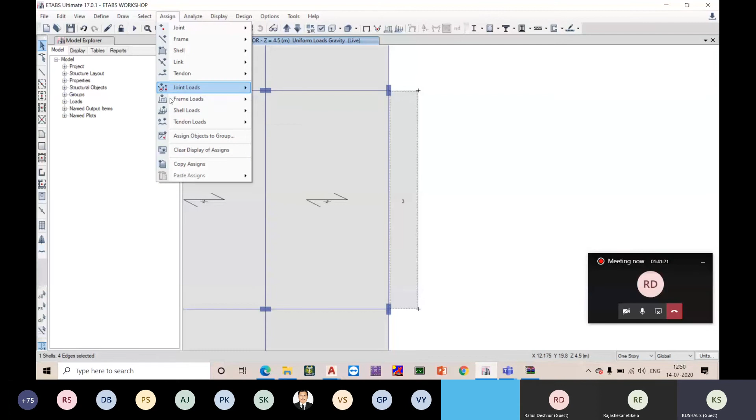So you can either assign it directly as shell area addition, 3 plus say 5.5, which will be 8.5. Okay, or otherwise you can also do one more thing. You can define a none section and assign your parapet loading on this.

That's it. Anything else? Excuse me, thank you. So may I? You can ask the question now. Hello? Rahul sir, you can ask the question. Hello. Hello, Rahul sir? Hello. Yeah, I can hear your voice. You can ask the question now. Tell me, sir.

I would like to ask one thing. In the slab definitions, for the cantilever slab you have considered shell thin, and for the other slabs you have considered membrane. What exactly is the difference between that?

So the main question is the technical difference between a shell and a membrane. A membrane is something that has support on all four sides, and a shell is something that doesn't have support on all four sides. A membrane transfers the load to the beams and then to the columns, while a shell directly transfers the loads to the columns.

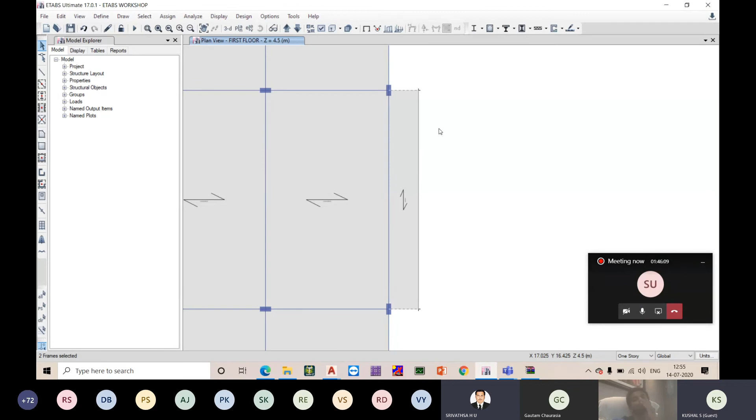Hello, good afternoon, sir. Yeah, good afternoon. Am I audible? Yeah, you're audible, so you can ask the question now.

I am Manu, I'm from SJC College of Engineering, currently in my third year of construction technology and management. Currently because of the lockdown I wanted to do an internship, a technical internship in our field, but I'm unable to do so. Can you suggest any possible internships which we can do remotely from our houses?

For those who are really interested and willing, we can have two types of internship activities. One is purely for design, where we will consider a zone 2 building for residential and commercial use, and discuss complete modeling of the same using ETABS, SAFE and STAAD Pro wherever essential. We will carry out all the stability checks and designs required for each element like foundation, columns, retaining walls, and also the design and detailing as per IS codal practice. So the complete load path definition, framing system definition, modeling using software, analysis, stability checks, and design for the complete project will be done.

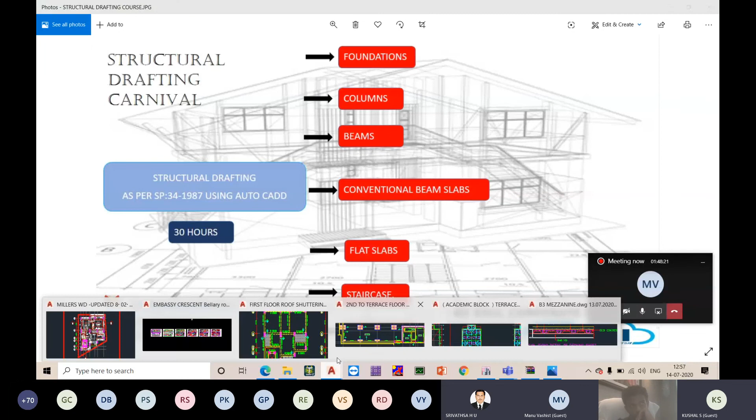That is one of the courses we are planning for 30 hours. The next course will be structural drafting, where we will do drafting of the structural elements and their detailing, like foundation layouts, framing system, reinforcement details for slabs, reinforcement details for beams, likewise for footings, columns, and staircases. All of this will be taught in this drafting activity. So we have modulated two courses.

One is for structural designs, where we will only concentrate on modeling, analysis and design of structures. The next is for structural drafting, where we will only concentrate on drafting and detailing of the structural elements using IS codes as well as AutoCAD.

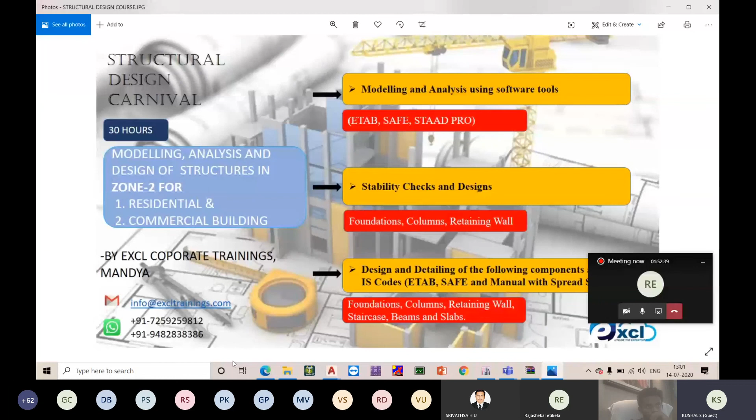See, even in STAAD PRO, you will be defining the complete member size. In the graphical user interface, STAAD PRO may show it as only a line element, but it has the property completely defined for the 200 by 450. In ETABS, in the plan, you may feel the exact shape of the column is provided, but even in ETABS, it is just a line element. In the graphical user interface, you may be able to see it as a column.

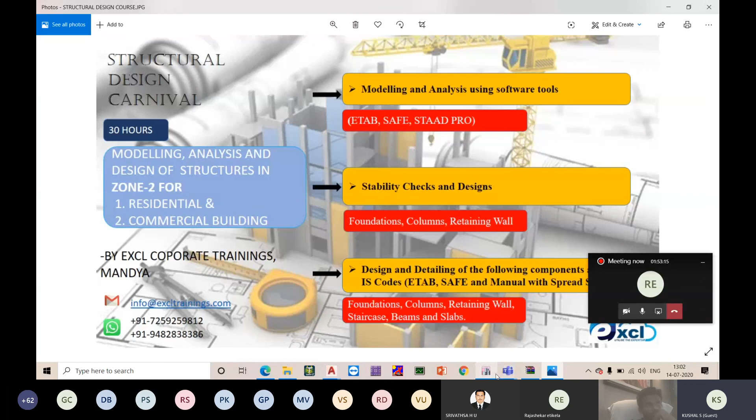For example, even in ETABS, this column will not be exactly modeled like this. This is just a line element. Only in the graphical user interface have they made it look like an area element, but still it is a line element in ETABS too. The analysis procedure both in ETABS and STAAD is the same. The only difference you may look at is in the procedure.

ETABS is mainly for the building sector. It is precisely for the analysis and design of buildings, whereas STAAD is a universal software. You can use it for modeling any type of structure, whereas ETABS is precisely for building analysis. That is why you will directly have your stories defined, your grids defined.

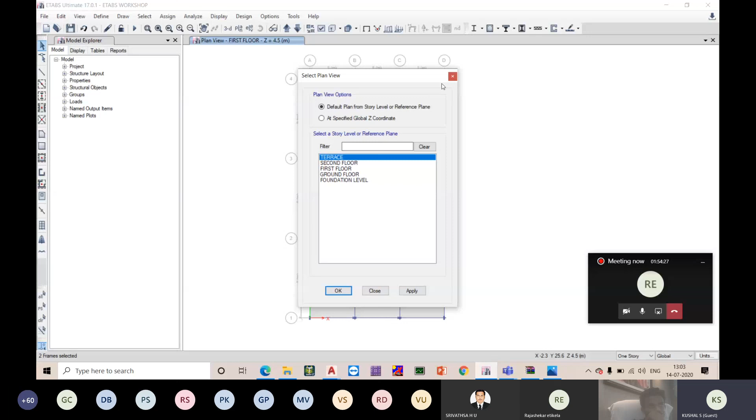And the definition of certain load parameters like earthquake loads, wind loads, construction sequence analysis, P-delta analysis options. ETABS has much more advantage and simplicity in these parameters, in earthquake analysis, in more advanced analysis. Even in STAAD you are able to conduct all of these advanced analyses, but the procedure is quite tedious. Otherwise, the results of ETABS and STAAD will be the same. There won't be much difference.